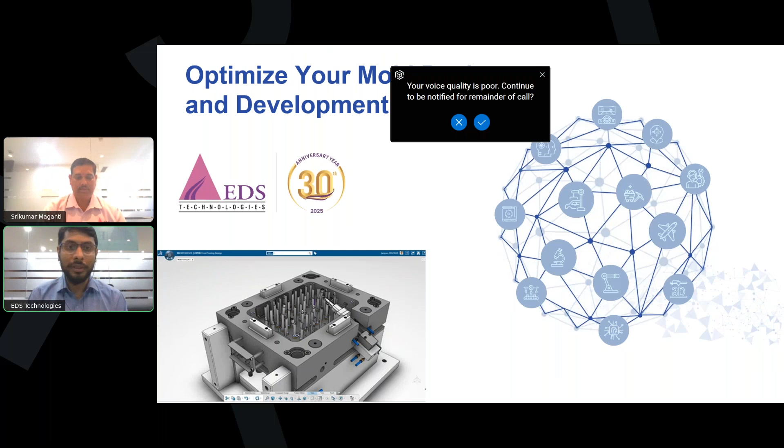Good afternoon, everyone. Thank you for joining us today for our webinar, which we have titled as Optimize Your Mold Design and Development Processes. So about our company, we are one of the largest technology solutions providers in India with

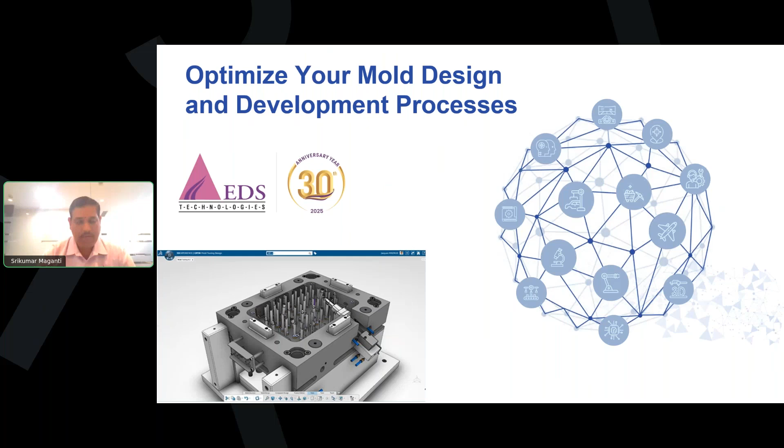Today's webinar agenda is on optimizing mold tooling design processes, especially for the product development and tool design. And we are going to provide a complete range of solutions from Dassault Systèmes on mold and tooling design, and how our customers have been using this effective module for delivering their mold designs as well as the tooling processes. I'm going to highlight on this in the webinar. So today's agenda is on mold and tooling design.

I'll start with the macro process, step by step, like how mold makers or the tooling design department go through these processes to arrive at core and cavity extraction, and then the relevant mold tooling, and also how they're going to utilize this module for their regular activities. Then I will focus on mold and tooling design typical challenges. So what are those challenges that are faced by the customers in the industry? And then I will dwell upon 3D Experience CATIA Mold and Tooling Designer overview, followed by benefits, and then our customer references across India and the globe.

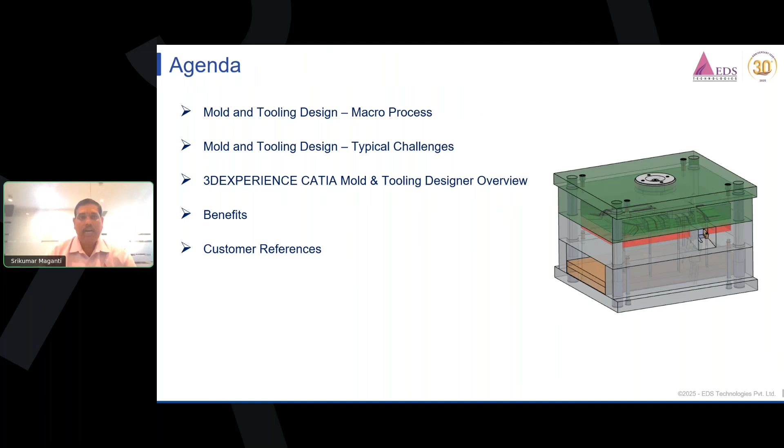So to start with the macro process, I'll be focusing on the current process, which is a general process basically in the industry. It starts with the preliminary design, wherein you look for model quality checking, then model cleaning, then you will also see the feasibility studies with respect to, say, plastics design, plastic fill simulation. Then you will also take care of all those manufacturing constraints like shrinkage and warpage factors. So you run through the plastic fill simulation and understand the feasibility study first as a part of preliminary design,

and then you focus on forming surfaces design, which involves core and cavity extraction, then the parting line, parting surface creation, and also if it is having some kind of undercut mechanisms, slides and lifters, and also rest of those elements that come in for a complex mold. And then we also look for some kind of collaborative design changes basically.

And then once I complete my core and cavity separation, with a clear-cut parting line definition, I move into mold structure design. So this mold structure design focuses on all the relevant elements, starting with mold base, and then you have cooling systems, mold structure, mold components, and their placement. And also we need to look at the impacts, and then we need to look at deformation, injection and cooling simulations. So this is something which is part of mold structure design.

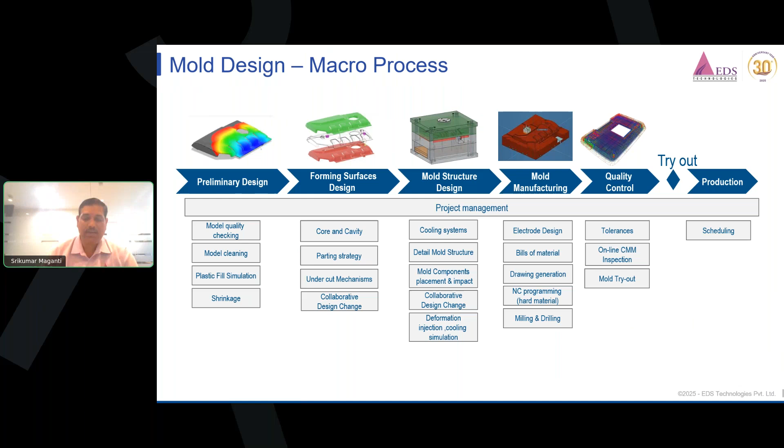So we'll start with what are those challenges that we may come across during this entire mold design process, and then how we can overcome those challenges using our solution. So if you look at preliminary design, typically OEMs provide their component or part drawing, and then they ask us to come out with a mold, and then start working on the prototyping based on this mold and tooling, and then deliver the prototype first, and then once it is confirmed through control plan and PPAP, then you go for production.

So typically OEMs provide the data, but they will not look into what kind of complexities are involved with respect to mold design. So that needs to be looked into first. And then it requires a CAE validation at the early stage, because without CAE validation, I will not be able to find out the defects, the shrinkage factors, or what kind of temperature distribution and pressure distribution happening on the specific plastic injection simulation. And then we need to look into those studies first, because without confirming that, we will not be able to move into the next level.

So then comes again the core and cavity extraction. Here also there are many changes coming in, and in order to finalize this design, it is going to be a little more time taking. And then we need to look at the mold structure design as well. So in this regard, with respect to the mold mechanism that runs in, we need to look at how to change the supporting systems, basically undercuts or slides and lifters, or it could be the cooling circuits. So we need to test and validate all those aspects in the mold structure design. Again, that involves a lot of changes, and many a time it is more time consuming.

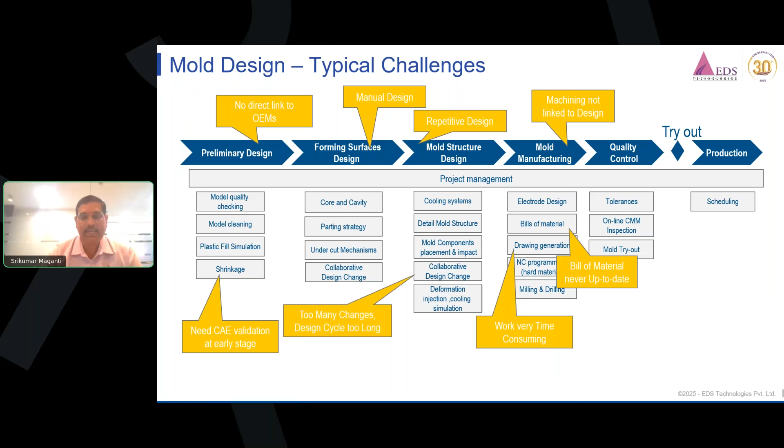And then we can actually overcome these challenges which are coming from the OEM or from the simulation perspective, or from the repetitive nature of the design based on the changes, and then automatic updates. So we have a solution to deliver using our mold and tooling designer role on 3DEXPERIENCE platform. So as a part of this mold tooling workflow, we have a set of processes to go through, starting with the plastic filling evaluation. Basically, the plastic filling simulation can be done. You can set the injection points and check how the plastic filling happens across the entire component or assembly.

And then once you go through this, you will be able to understand any kind of shrinkage factors or any other manufacturing constraints. You can virtually validate first with this plastic part manufacturing feasibility assessment. And then once it is completed, you will move into preliminary design. So preliminary design, as I said, focuses on core and cavity extraction, parting line, parting surface creation, and then accordingly, we need to look at the rest of the mold structure design aspects.

So here you study all kinds of mechanisms, and then you'll also see what the tool structure principles you're going through in this. Then you move into detailed manufacturing simulation. So here you will set up the cooling circuit, and then you see how it is impacting the entire core and cavity. And also, once you set up this, you need to simulate that and see how it is actually helping.

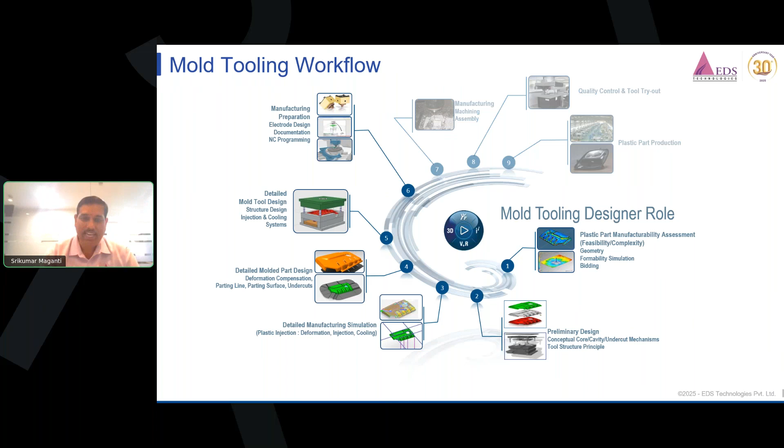So from the 3DEXPERIENCE CATIA mold and tooling designer role, using this you are able to complete all these activities, be it design or simulation, or defining the assembly mechanisms, and then checking the interferences, the draft angles, and then finally going for quality inspection and production. So every aspect is covered using this particular role.

And if you look from the typical manufacturing perspective, the mold and tooling designer will go through 6 steps here. I will run you through these steps with the help of a case study. So starting with the initial plastic part evaluation, or the feasibility assessment, we will run through typical plastic filling simulation, which is part of the same workbench, which also involves design as well.

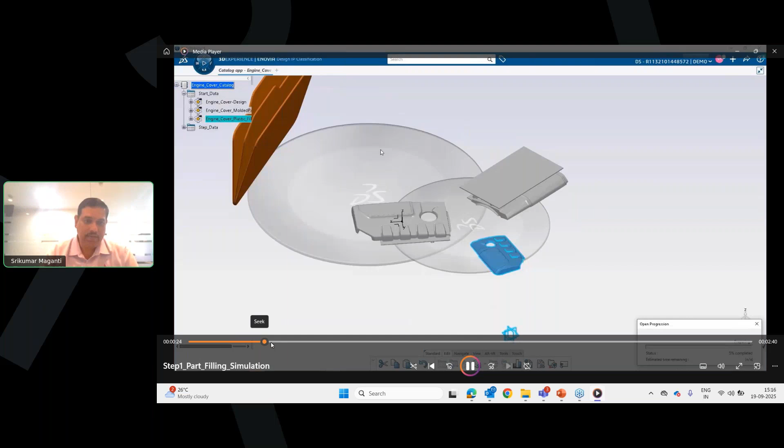So in this example, we are going to take a case study of an engine cover. So the engine cover, the plastic part which is highlighted over here, needs to be brought in, and then we need to look at where are those injection points that I need to define. So this is a typical 3DEXPERIENCE CATIA workbench. So you open the part, and then you look for any duplicate elements.

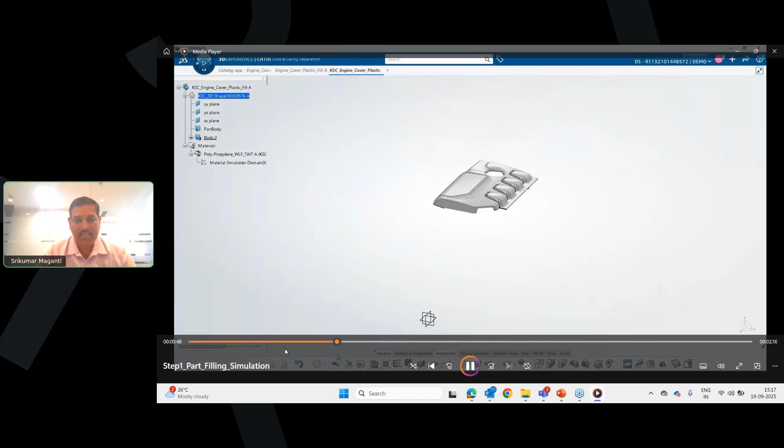You want to check the surface first, and once the surface is checked, then you will enter into the core and cavity separation application, and there you define the injection points. So in this case, we are defining 2 injection points for this particular engine cover.

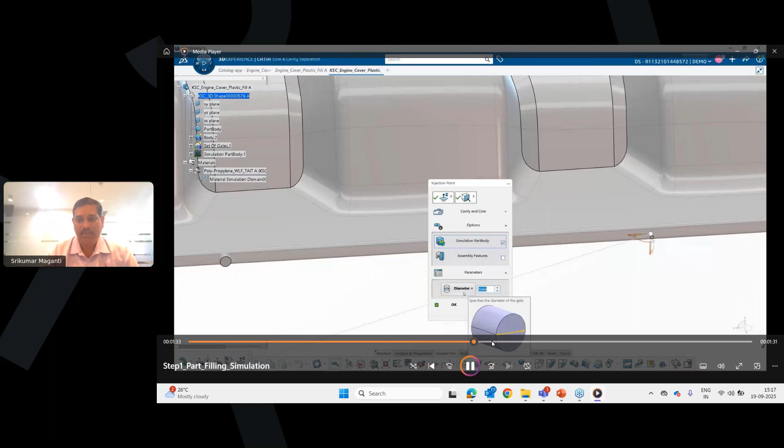So once I define these injection points and mark them here in this particular engine cover, then, without changing the application interface, I'll straight away enter into the plastic filling simulation workbench. So this is like you are switching from design to simulation without moving out of the same user interface.

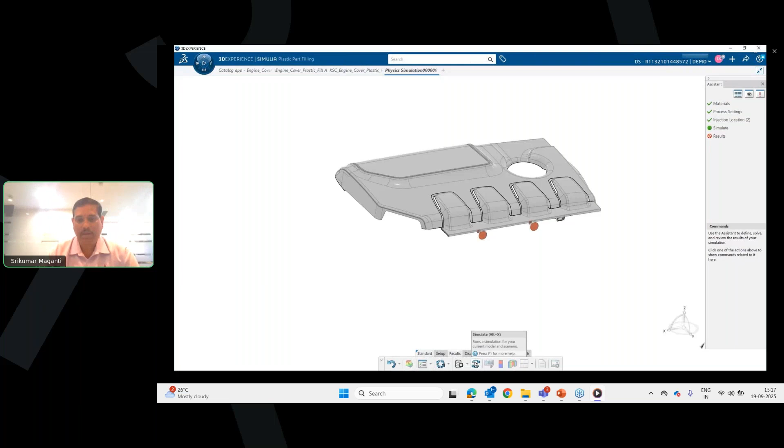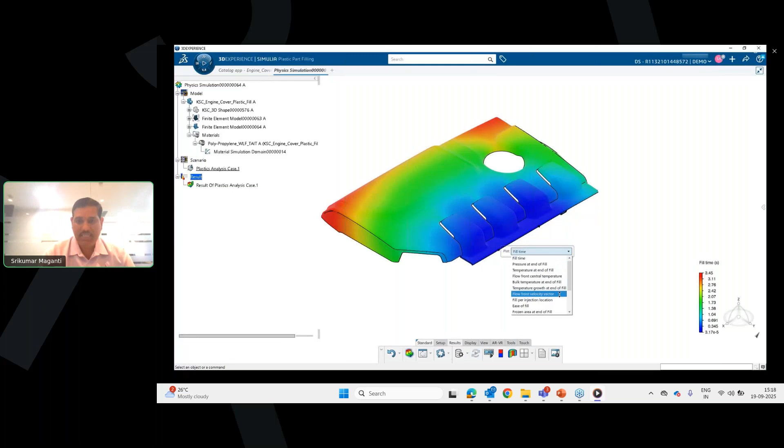So here you define the simulation constraints and then injection locations and the process design, and then you go for the simulation aspect here. So once you run the simulation iteration, you will find what kind of temperature distribution you have, what filling time is needed, what the pressure distribution is, and also what kind of stresses are there, and if any problems are coming in with respect to this engine cover filling, we will come to know in advance through this virtual validation.

So here we have business intelligence essentials, using which we'll be able to find out all the intelligent information. So in this case, you can see volumetric shrinkage analysis, and you can also see weld lines. You can also see the ease of filling on the injection lines. Everything can be studied with the help of this particular module. So once you complete this plastics injection filling evaluation and assessment, you move into core and cavity separation.

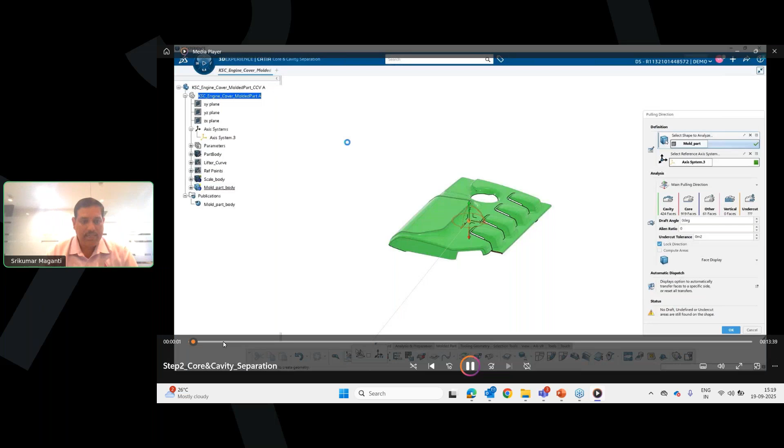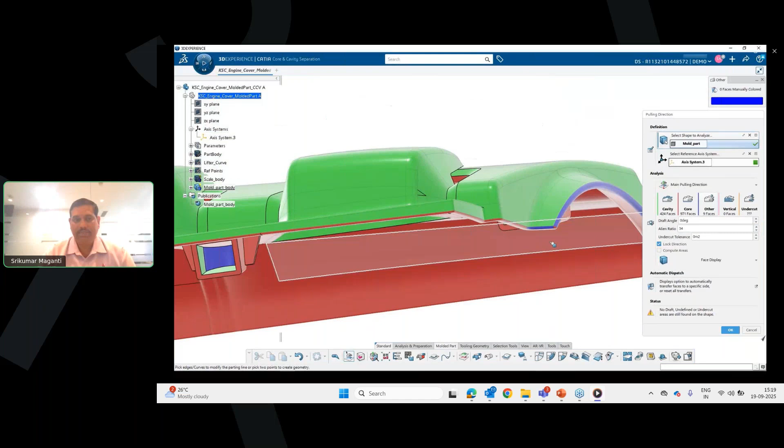So as a part of this core and cavity separation, I'll be creating the core and cavity first, and then I'll be defining my parting line. So in this case, first we need to go for the pulling direction, and then we need to define all the edges properly. In case edges are not properly defined, say with respect to continuities, we need to work on that. Again, if there are any undercuts, trims or ribs coming in, we need to accordingly pick up our surfaces for the pulling direction.

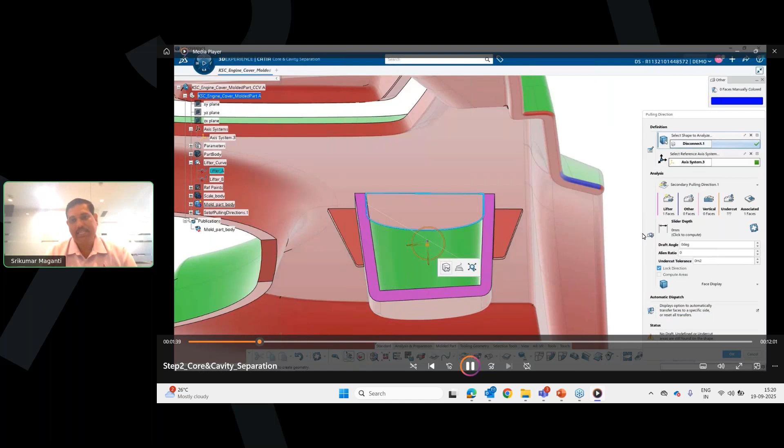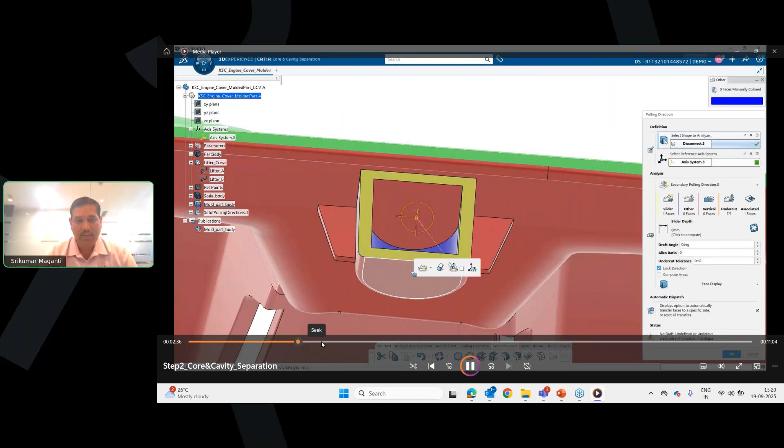And then you need to define, as you can see on the right side, we have all the features to highlight, which is cavity, vertical, undercut, and then the associated faces. We need to define them here. Using this application, we are able to first pick up the pulling direction and then the cavity surfaces. You can also define the draft angle here if it is needed, and then you can highlight any pockets or any cuts which are there. We need to highlight all those surfaces. Accordingly, we need to pick up the edges and things.

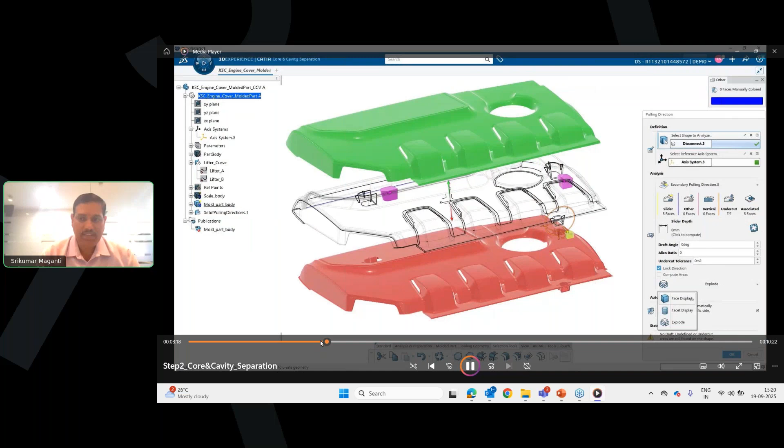So now you can see after doing this entire operation on this surface, you are able to see the core and cavity and also the pulling direction properly defined here. So you have the engine cover and you are able to see how things are coming in. You are able to simulate also here in this workbench straight away. So this is a simple pulling direction which is defined here.

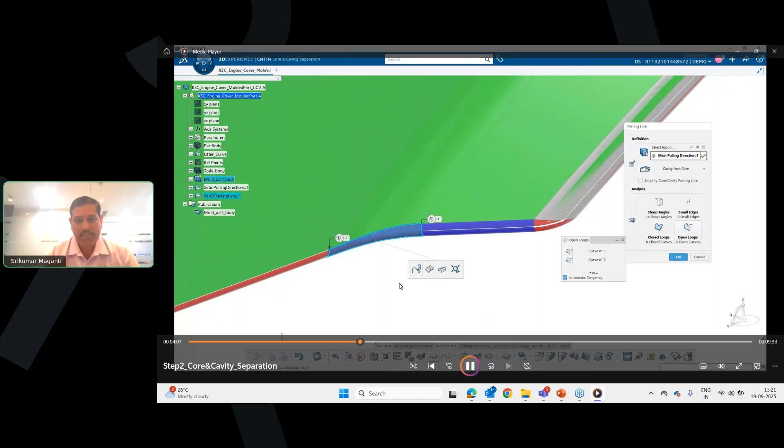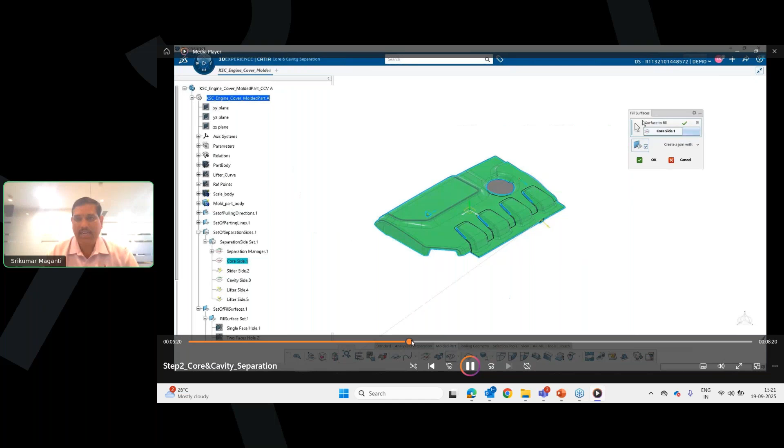Now I will go for parting line definition. The parting line definition has to be clear in this case. This is the one which is going to decide the core and cavity separation. The parting line definition has to be done with the help of the edges which are available and which are continuous in nature, typically tangent continuous. So you pick up all the parting line elements step by step, and once you define the parting line, here we have the separation manager. You can highlight that, and once I have the parting line in place, I can create the parting surface.

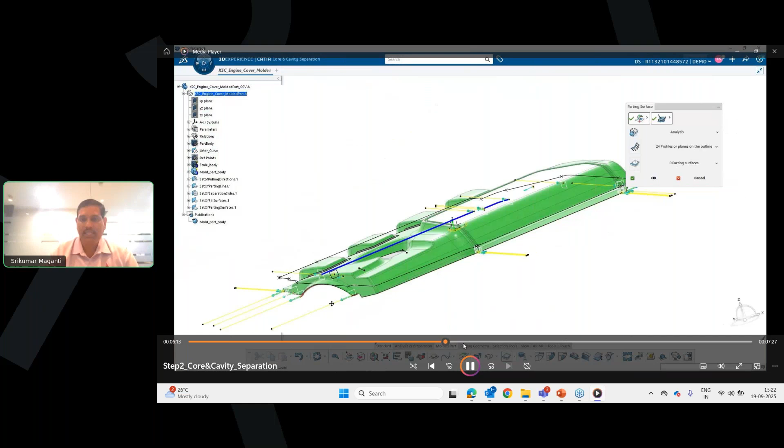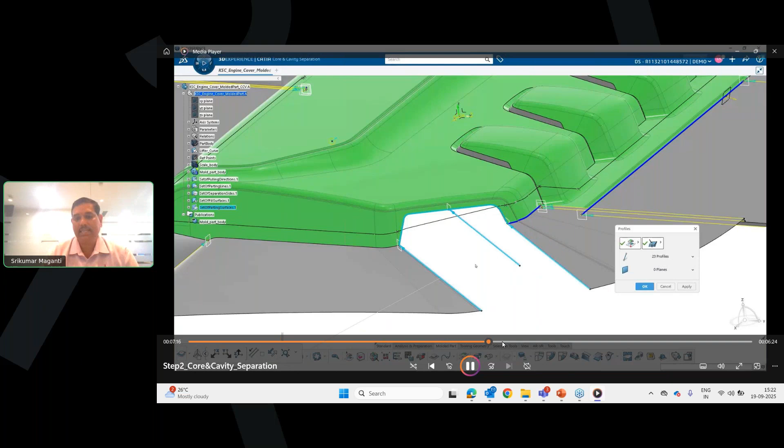This parting surface can be created with the help of the parting line by extrapolating the current surfaces which are available there. So we can extrapolate that in this way. I provide the direction which is tangent continuous and which is also touching the parting line, and I'm able to extrapolate my surface to create the parting surface first. This parting surface creation is a very critical element, because this is going to define the volume very clearly. So this is how the parting line is created, and the parting surface is created step by step in this fashion.

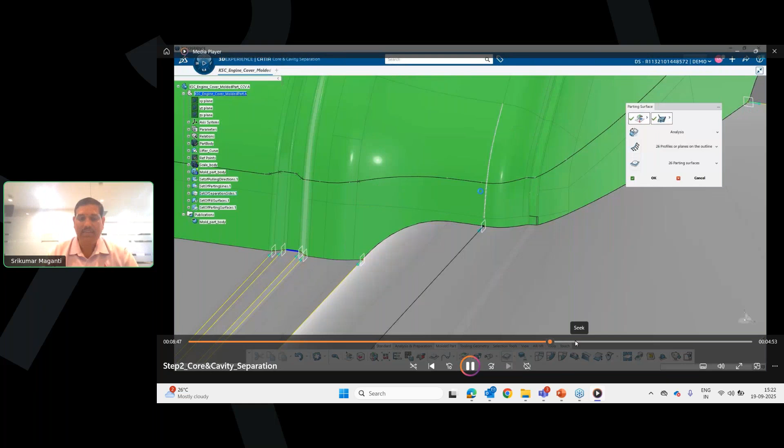So once the parting surface is created, now I am very much clear about my parting line, pulling direction and surface, and then the core and cavity separation. This is what we are going to do in this core and cavity separation workbench. And once I complete my activity on this, I can see the parting surface is properly defined with all its continuities in place for this particular component.

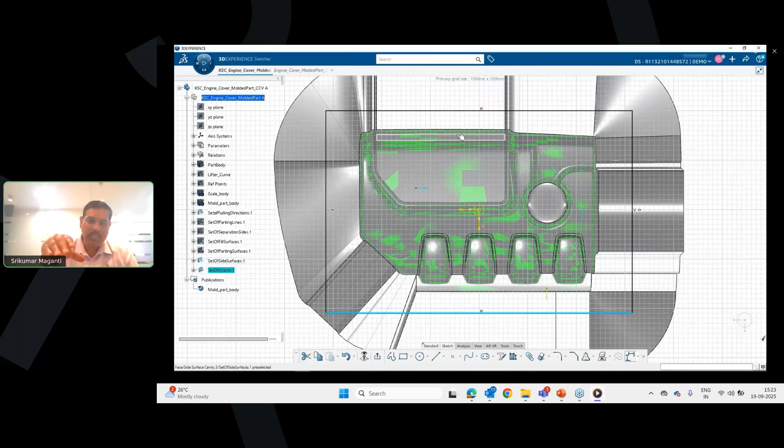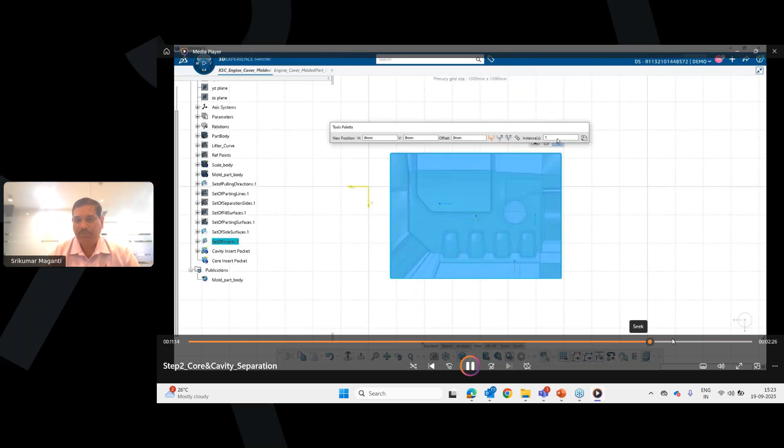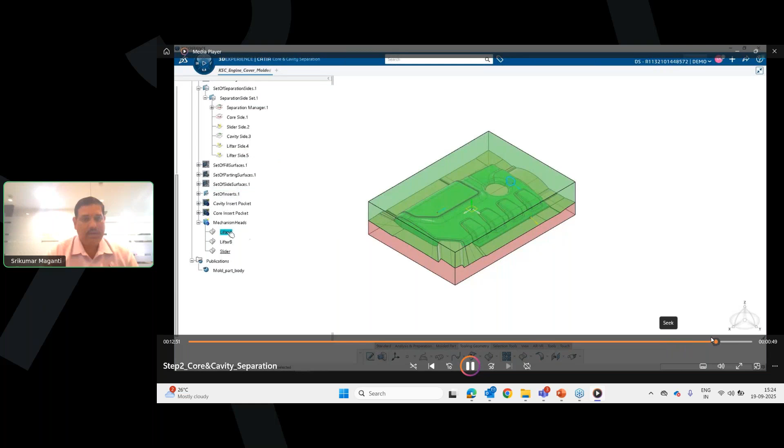So I have a typical mold base now. I have just created the bounding box, not a mold base. It is just a bounding box which is created based on the core and cavity definition which has been provided, along with the parting surface in place. So now I will take this bounding box and then I will move into mold structure design.

So this is the first next step. As I said, we have moved from plastic filling simulation and assessment, and then we moved into the core and cavity separation workbench. We created parting lines, pulling directions, and parting surfaces. We have defined the core and cavity, and also we checked the overall bounding box calculations and the volume calculations in this workbench. Now I move on to the conceptual design, which is basically dealing with the mold structure.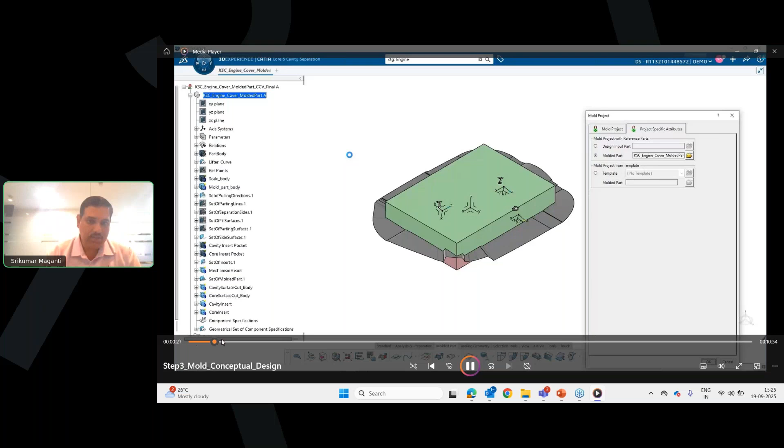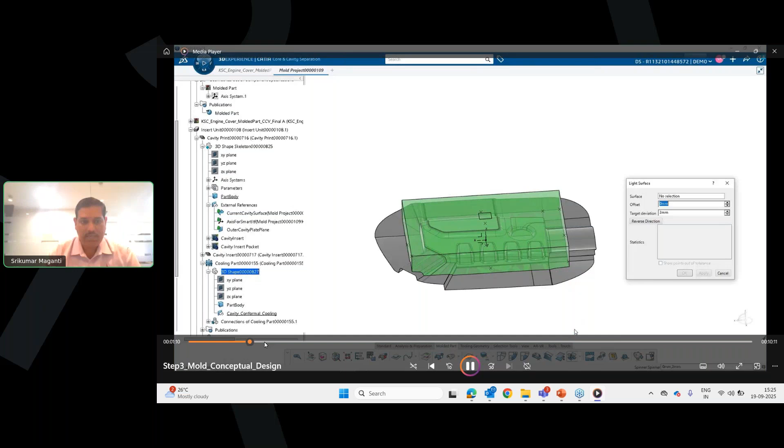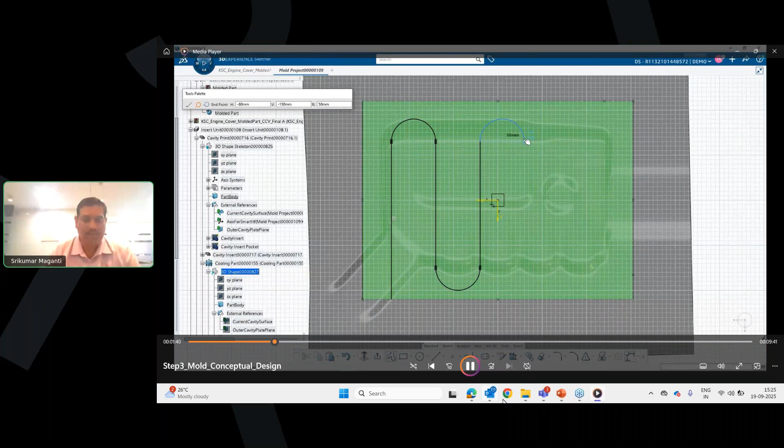And now in this case, we are creating the cooling lines, the cooling circuit basically. So we can simply create a sketch and then project this same sketch onto the cavity, onto the plastic engine cover component. So onto the parting surface itself, you can project these lines and then create a cooling circuit, and you can verify and validate that. Once you complete the sketch, you can see this is being projected here.

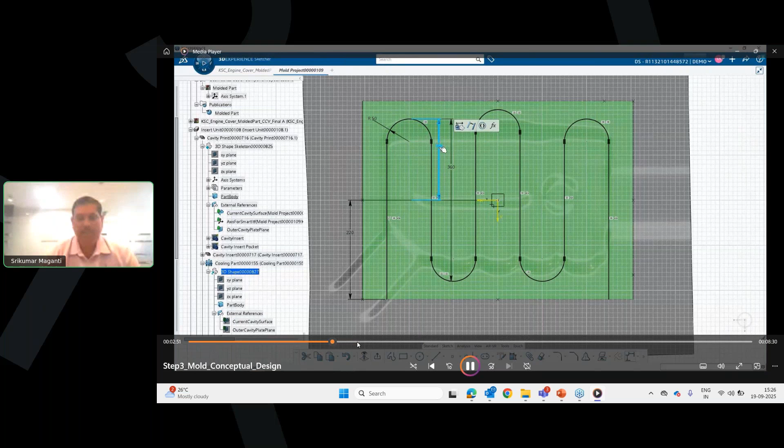So the cooling lines are projected onto the parting surface here. Now you can also create the section for these cooling circuits. You can define the diameter of the cooling lines, and then you can create those cooling lines here around the mold.

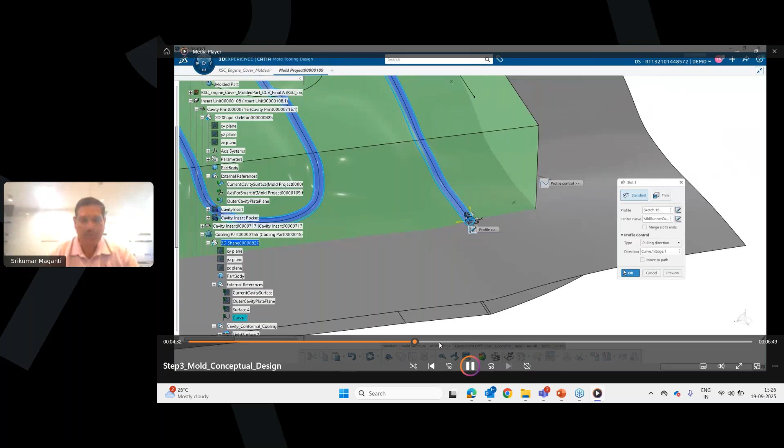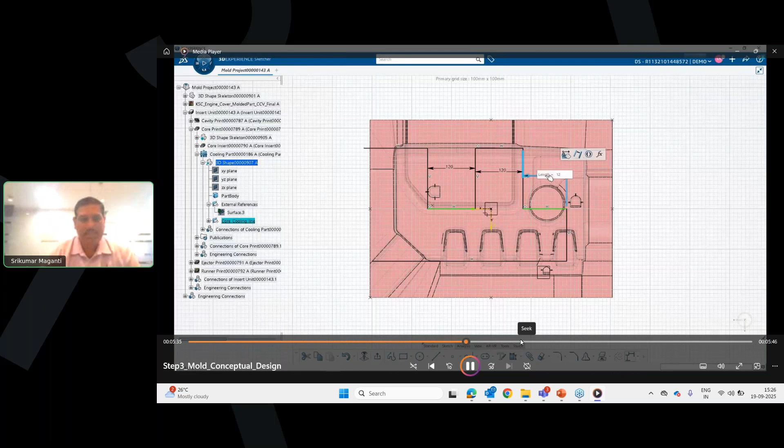Then once I complete that, I will move into the next level, that is, now I need to go and create baffles, and then I need to see how these baffles are connected with respect to the circuit. And then once I complete that, now I have this. I'm able to pick up all these from the catalog itself straight away, and then create these things, right?

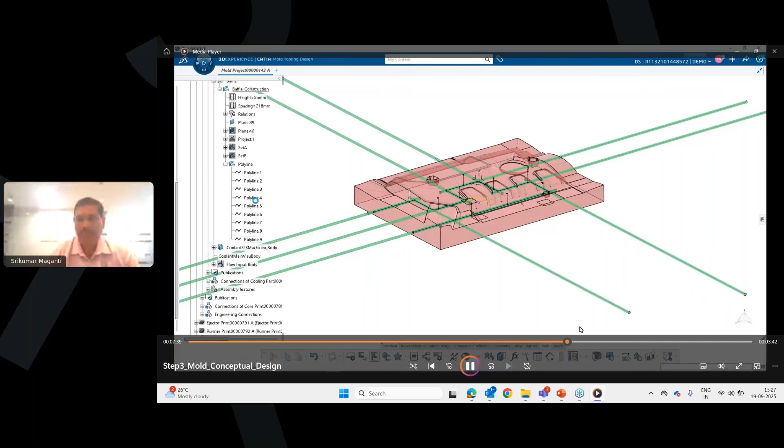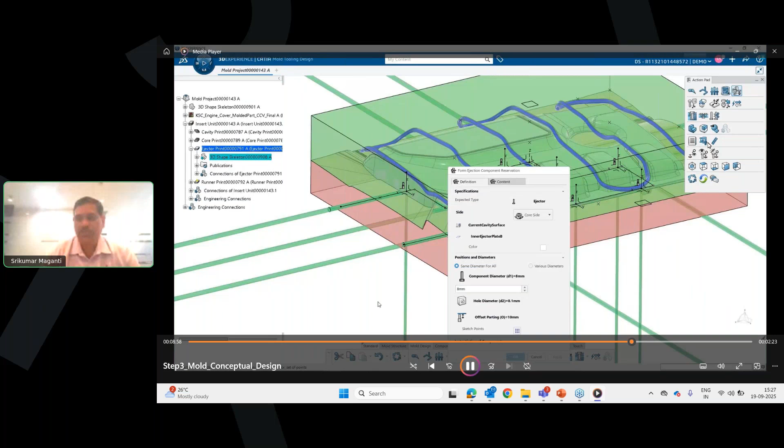Right. So once you complete that, you can also check the interferences, and you can run through clash analysis and see how these ejector pins are highlighted over here. And also you can see them separately in this tree structure, and if any clashes are happening, we can actually eliminate them by running through the interference checks and analysis.

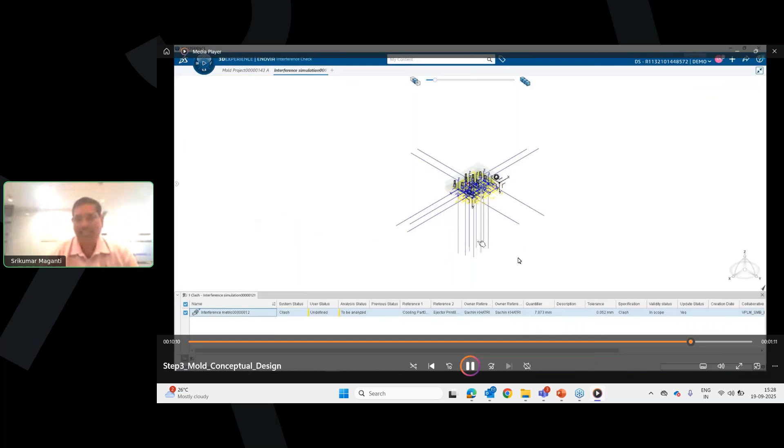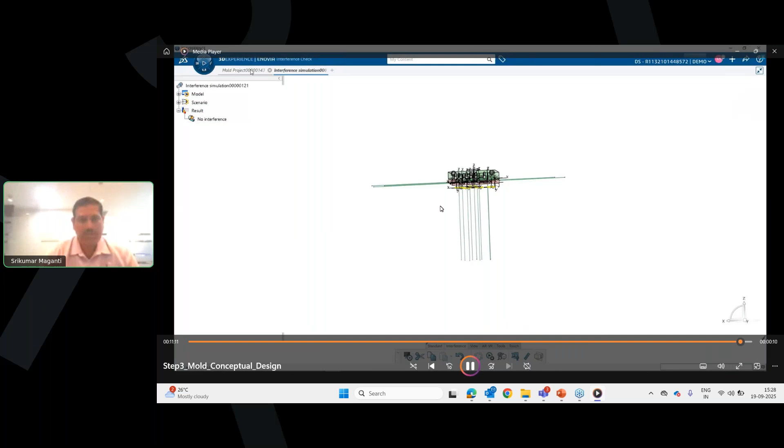So this is how I'm going to complete my mold structure design with respect to ejection systems or cooling circuit definitions, and then I will complete my mold structure design. Then I move on to the detailing of the mold base configurator, the detailed mold design, in the same example.

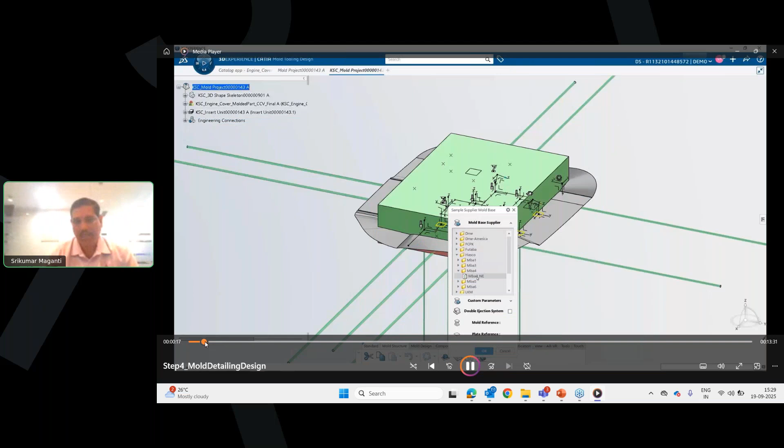So here, as I said, we bring in these mold bases. In this case, we are picking up Hasco, which is the mold base we have selected here. DME, FCPK, Futaba. There are so many different standard mold bases available. You can pick them up and position them here in the right way with respect to this mold design for the engine cover.

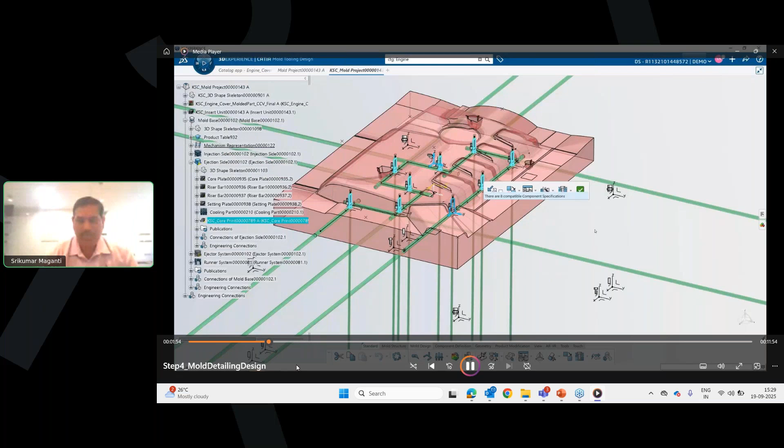So once you complete that, you will also look into all those sliders and lifters and the undercuts. You need to define them properly here. So we can look into the tooling component systems, which are again picked up from the catalogs. So you can see here how the ejection is going to happen, without any rotation. How the ejection is going to happen can be studied here. We can actually create the mechanism and run through that.

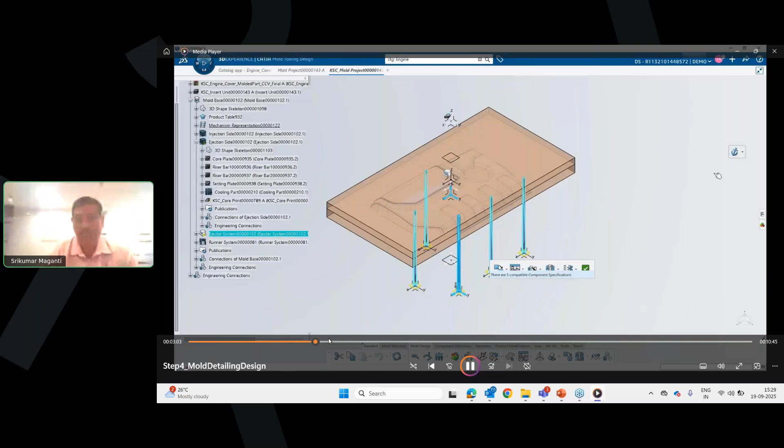So here, these are some of those undercuts which are there. Now, accordingly, I need to pick up those elements and define those slides and lifters in this case. So again, the lifting mechanism also needs to be looked into: once the core and cavity separation is happening, how this lifting mechanism happens can also be studied here.

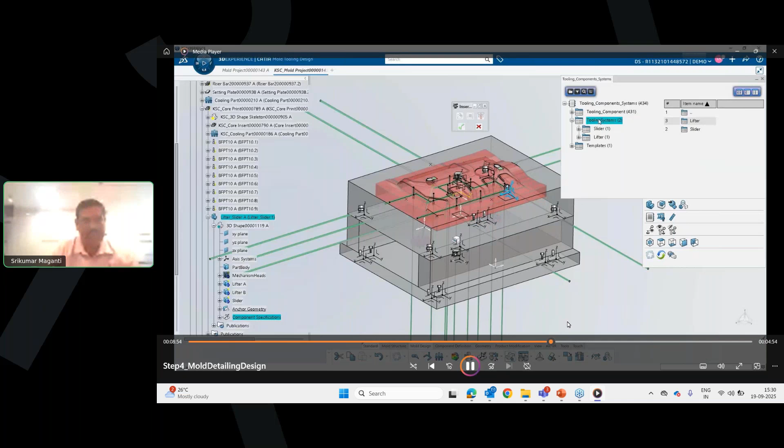You can see in the tree structure, you have the mold base, injection system, ejection system, and also the runner systems. And then you have the complete definition of the detailed mold design, which is coming over here along with the mold base. Now, once I complete that, I can also look into the mechanism.

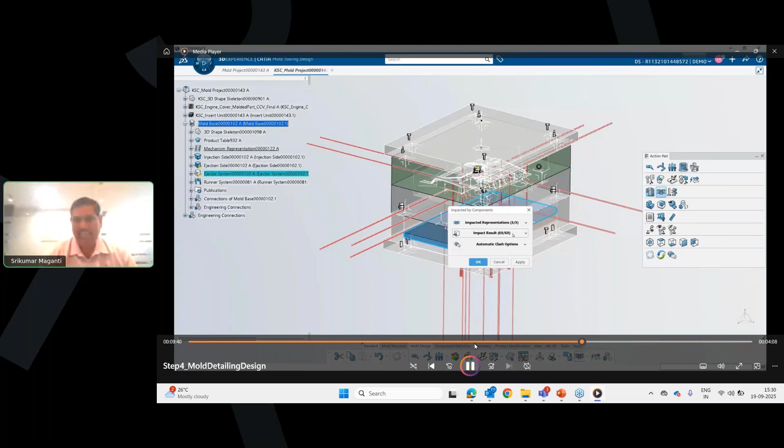We are defining the injection points here, as we did earlier in the plastic filling simulations. Same way, I'm defining my injection points, and then I will run through the mechanism, and I'm creating a simple runner circuit with the help of a sketch.

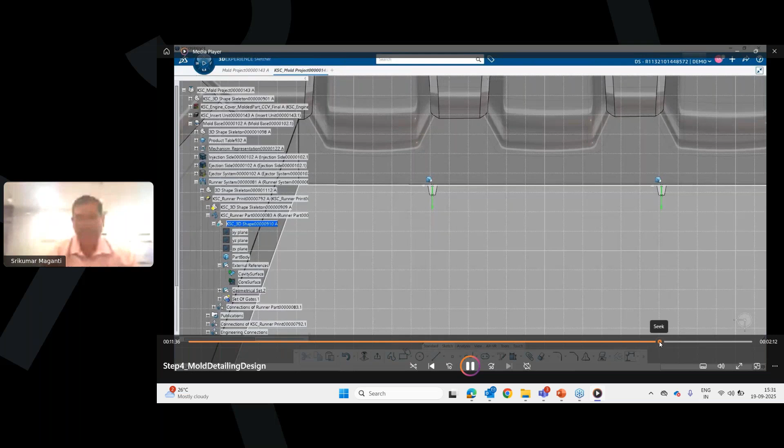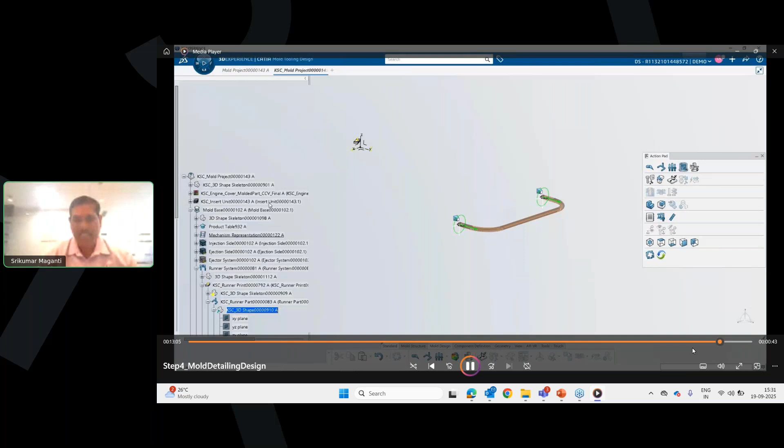So for these injection points, I'm creating a runner, and this is a simple sketch which can be utilized here, and we can create the runner as per the injection points. So once I complete this, my detailed mold design is ready, and now I can go for the complete mold mechanism. I can run through that and see how the lifting is happening, and then we can also create the mold drawing from this.

So you can see the mechanism, a simple kinematics mechanism, which is running here. So this is how I'm going to create my mold structure design, then detailed design, followed by mold drawing. And in case any changes are happening, how these changes have to be accommodated and automatically updated, those are the things which are taken care of in this 3DEXPERIENCE platform interface, wherein you don't need to move for all these multiple activities. Everything is done under one single user interface.

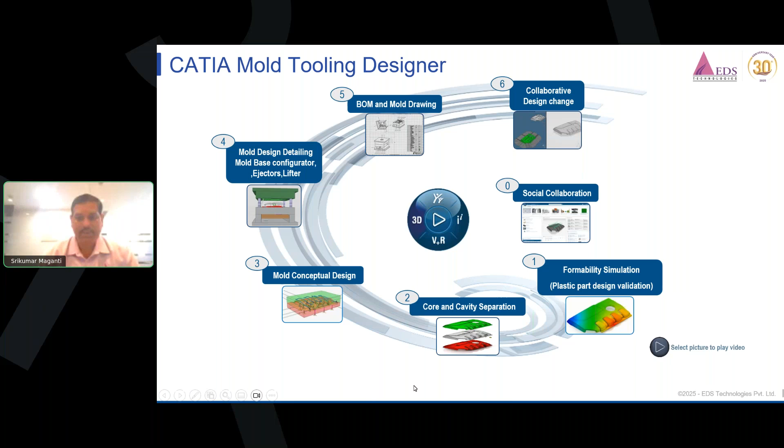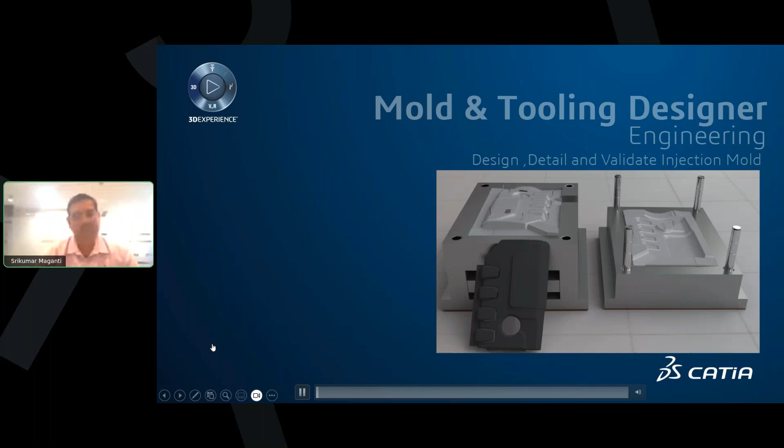So I will run through the full example here, whatever we have discussed. It will take you through the complete set of processes with respect to the detailed mold design of this engine cover. So we start with the plastic injection simulation. We see the temperature distribution, pressure distribution, shrinkage, and also what kind of ease of fill is happening, and we can see all those aspects with the help of business intelligence essentials.

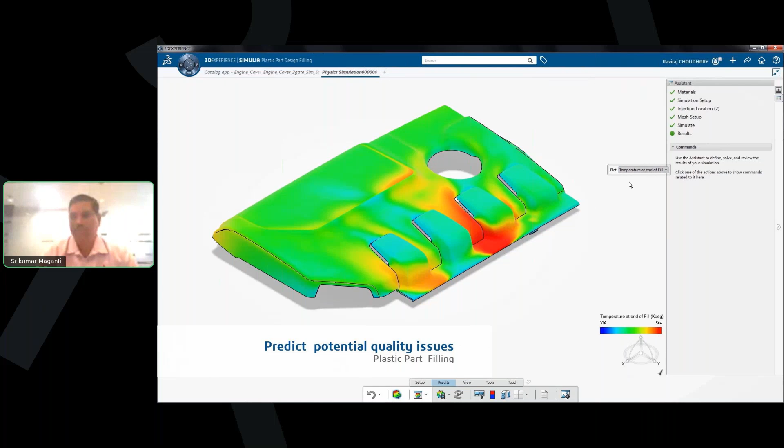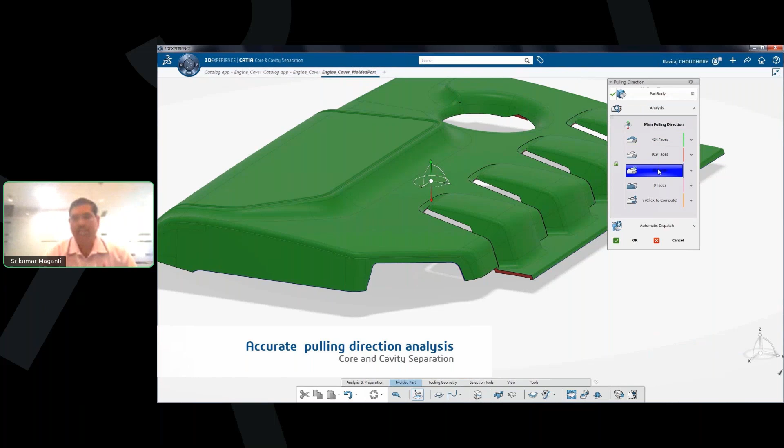So we can also optimize the gate locations based on the simulation, and now I move into the next level, that is the pulling direction definition. So we choose all the faces. There are so many faces which are being highlighted over here. Whether it is a primary pulling direction or secondary pulling direction, we can define all that. Again, we can set up those draft angles and define this pulling direction.

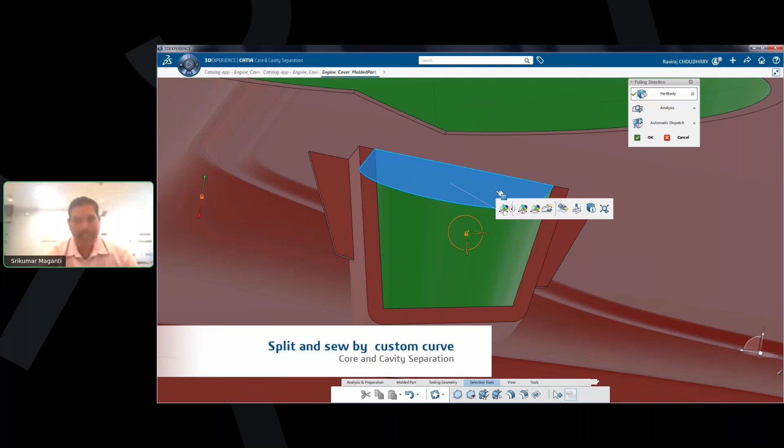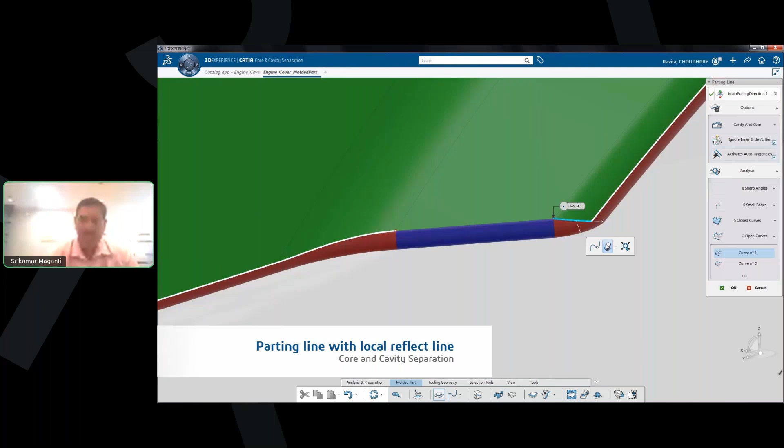Then we enter into the definition of the parting line. For this parting line definition, again, we need to look into all the complex shapes and undercuts, and any other elements. So I create my core and cavity separation over here in this fashion. These are all extracted surfaces from the parting line. So we need to see that this parting line is fully continuous in nature, because this is going to help me create the parting surface later with the extrapolate commands.

So once this is completed, then automated fill surface creation, and we run through one single command to create the parting surface. So the parting surface is generated in this fashion. Once I complete the parting surface, it looks like this. Then I create my bounding box and see how my mold is going to look.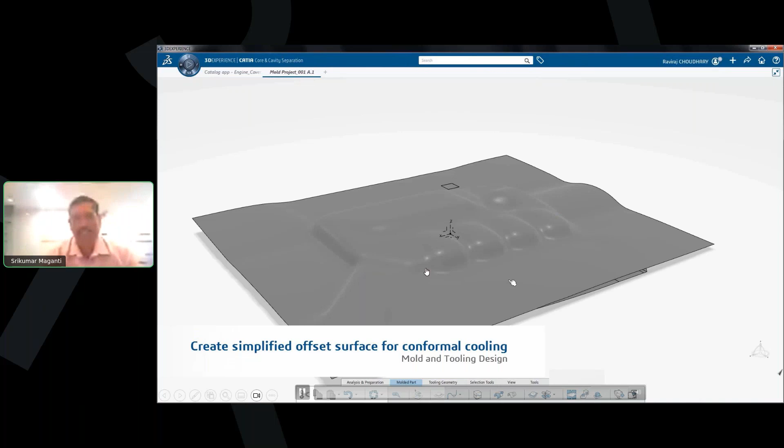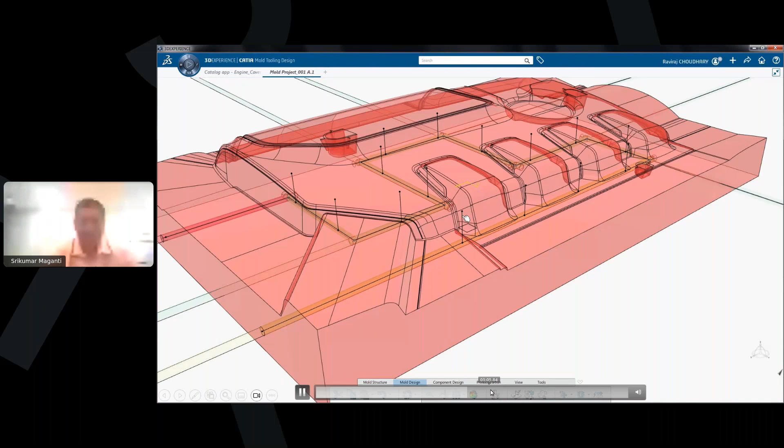Then I define my cooling circuit. Basically, the cooling curves have to be created, and then these lines have to be projected onto the mold, and you can see how they are being projected over here onto the core. Once it is completed, I enter into drilled coolant based on the sketch, and then the baffle construction. This baffle construction has to be defined over here, and then the ejection points, we need to look into that. We need to define the ejector pins, and the rest of the elements, sliders and lifters. So these are all available.

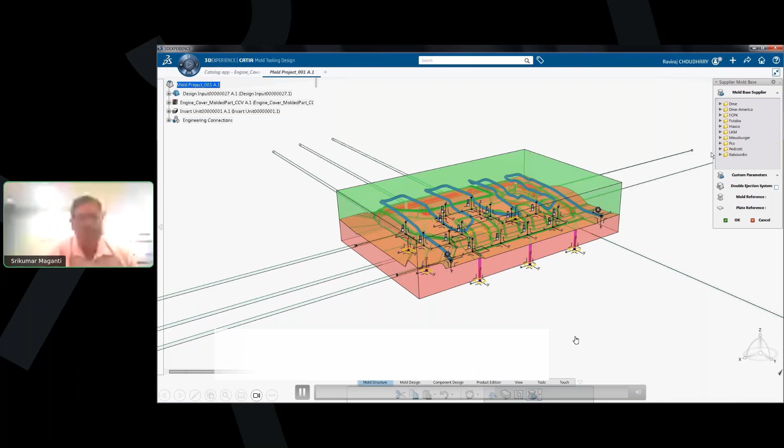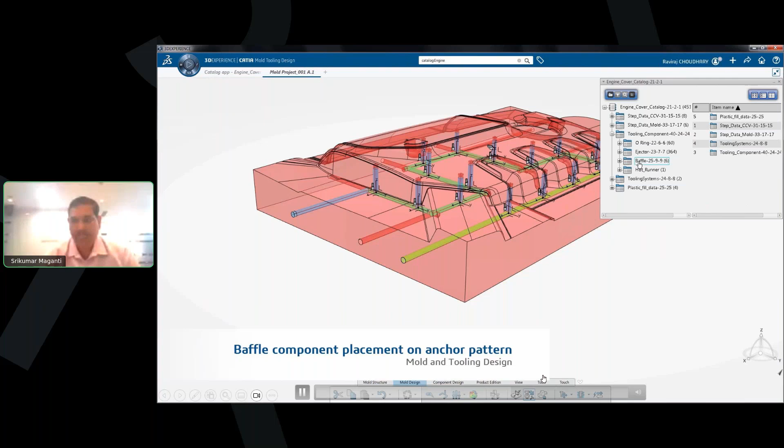Once this is completed, I will define my mold base. As I said, I pick up my standard mold base from the catalog, and accordingly set it up over here with respect to this engine cover component. Then this is completed. Now I will also look into the mechanism, the ejector placement, and how they are being operated over here. We need to look at the anti-rotation detection in these ejectors, and how it is going to lift this component outside. We can do the ejector kinematics.

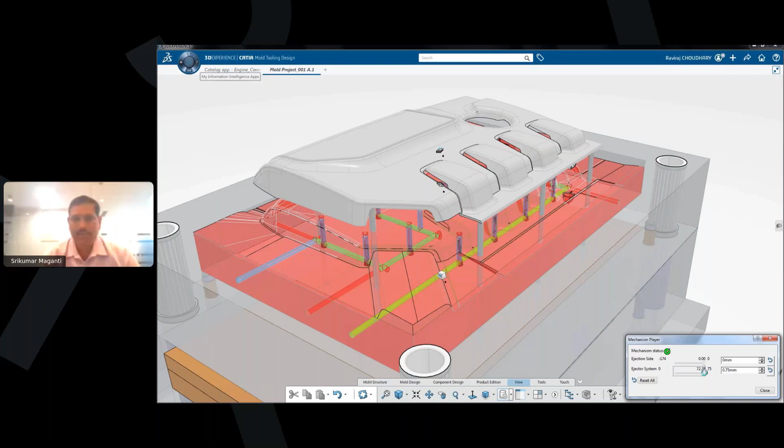We can even reuse the complex lifters and sliders mechanisms over here, and then we can experience the entire design in motion. So from the mold base, you can see how this is being extracted out. The entire mechanism can be simulated in the same workbench. So this is how we complete this complete detailed mold design.

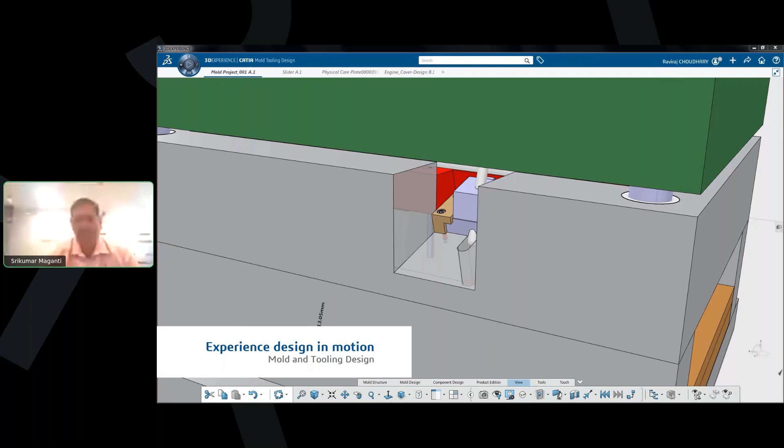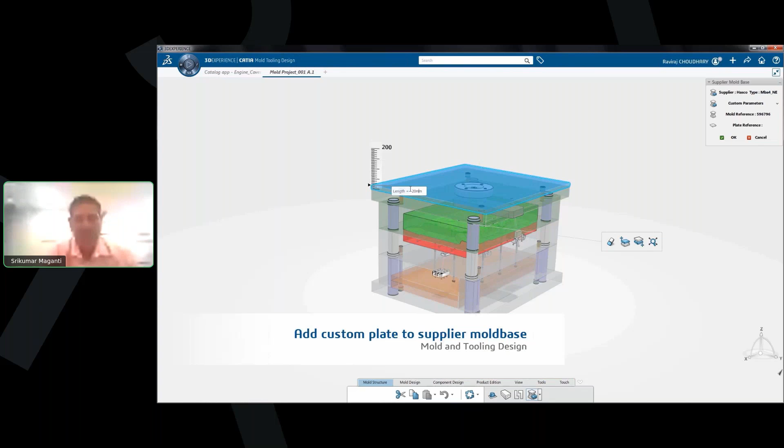Then I also create my injection points. Then I will also create a runner based on those injection points. So the runner gates are ready. Then you can see the final detailed mold design. Now I can go for mold drawing, basically the manufacturing drawing creation. I can definitely do that.

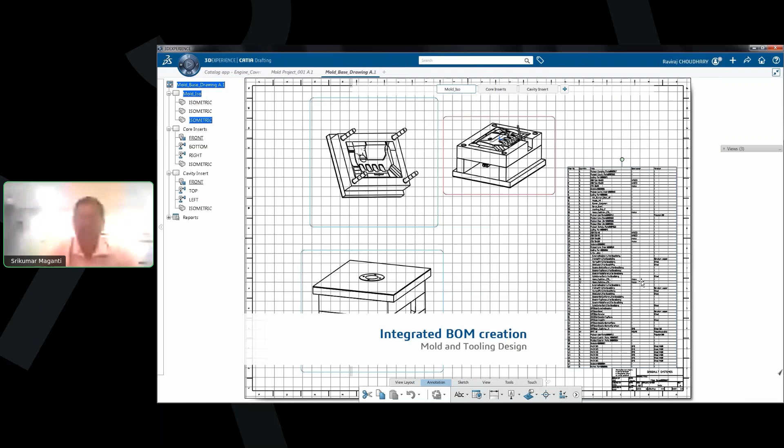So once I complete that, now I'm able to create my integrated bill of materials with respect to mold design. I can simply generate these reports and put them in the Excel sheet, and you can also bring them into drawing as well. So this is how my complete detailed mold design is going to look like for an engine cover. So this is one case study I wanted to highlight in this demo today.

So we can do all kinds of simulations. We can also bring in all kinds of complex elements into this, and then we can define our detailed mold design in an accurate fashion. So the most important thing is that you are able to benefit, because this is all coming from the same user interface, and it is easier to define all the elements in one go.

So, there are so many powerful assistants for core and cavity preparation, which is the most important activity of this mold design. And then you can also look at design change management, because if you make any small changes here and there, it can be automatically updated. And then, of course, we have the rich catalogs which have all the standard mold bases, ejector pins, and then again sliders, lifters, and many other core elements of this mold design, which are readily available.

And then, of course, you can also standardize, customize, and reuse these templates again for the other activities as well. And of course, you can always look for quality improvement, and also you can reduce the total design cycle time, and you can ensure that there is digital continuity and traceability secured with the parallel and all the downstream processes.

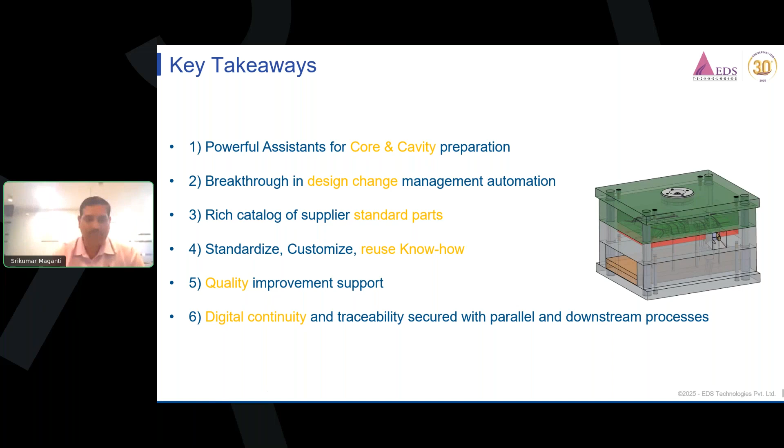And then when we complete all that, we will also move into generating these mechanisms, and we can also see all the interference clash analysis on the fly, and we can arrive at an accurate detailed mold design in this fashion. So we can generate the drawings, you can also have the continuity, you can do all the modifications and automatic updates with the help of the same workbench. So that's what I would like to offer here today with the help of this case study in this 1 hour of webinar.

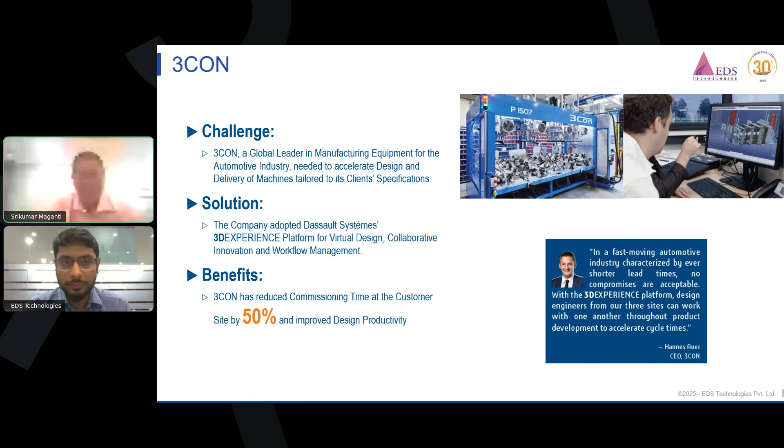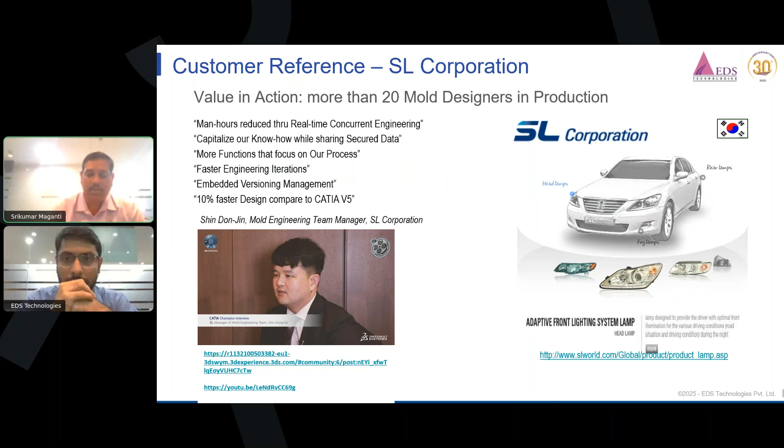It's much faster in terms of design time, and also it's about accuracy, and also the right prediction that we can do using this. So it definitely serves in terms of quality improvements, reducing the design cycle times, and also the overall cost benefits that can come. So these are some of the examples I wanted to highlight today with respect to this particular webinar.